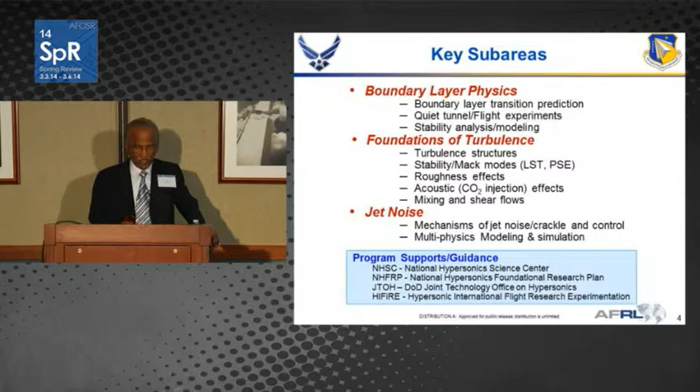And along with these sub-areas, I need to mention the other organizational tools we use to promote this research, particularly the National Hypersonic Science Center, and I will have a few slides as I go on, and the foundational research plan. This is another plan we use across the portfolios in the Air Force or program offices, and also supported by the Joint Technology Office run by the DoD and HIFiRE programs, which have a good connection with the TDs, particularly the RQ and other directorates.

Now, the scientific importance, as you see here, this chart illustrates everything of aerodynamics.

When you throw something in the air and want it to fly at Mach 6 or Mach 8, what are the forces and environment it will encounter? It's clearly illustrated there, starting from the stagnation point to the transitional boundary layers to the separation, the lift and the angle of attack, everything comes into play.

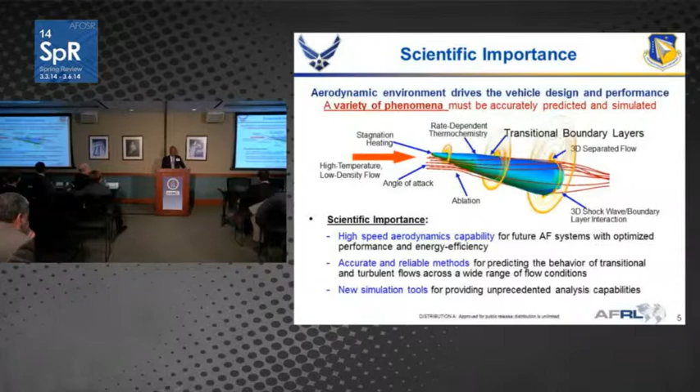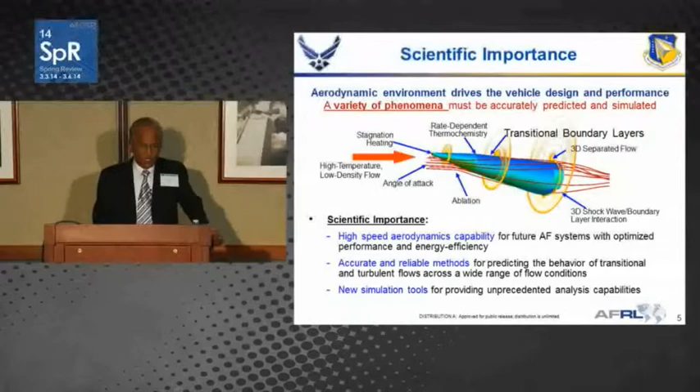And all these are important to study because we have to make the vehicle faster, lighter, efficient, and also controllable. And the importance, as I show below, high-speed aerodynamics capability is our Air Force main mission, and accurate and reliable methods. We have to create tools to analyze these aerodynamic bodies, and then simulation tools. I think we have to keep doing that until our beam energy folks can help us. Already it is coming into work, but still the conventional weapon system depends upon aerodynamic vehicles.

And when we talk about the potential revolutionized capabilities, we have to make this vehicle lighter and dynamically stable, and have increased range for reachability, particularly to deliver weapons. And the main problem with these fast-moving vehicles is the skin friction drag, which consumes a lot of fuel and becomes inefficient. And on top of that, the thermal protection system has to be lighter too. If you design it improperly, you will pay a penalty in that direction. So all these support facilities and numerical tools are very important.

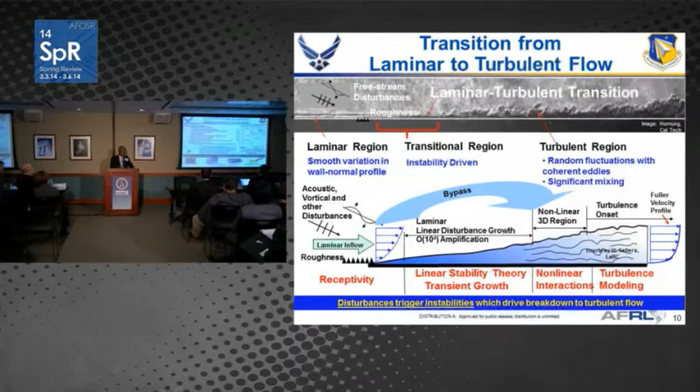Imagine the surface of the flying vehicle, and then the boundary layer builds over the surface like this. Initially it goes smooth, and then in a certain transition region, the disturbance develops into turbulence. Beyond this point it becomes completely turbulent. So the main disturbance factors are the key to understand the turbulence physics happening there. Sometimes the disturbances suddenly make the boundary layer transition into turbulence without even having a transition region. That's what is called the bypass region. So just to give you an understanding of how this transition flow is modeled and looked at.

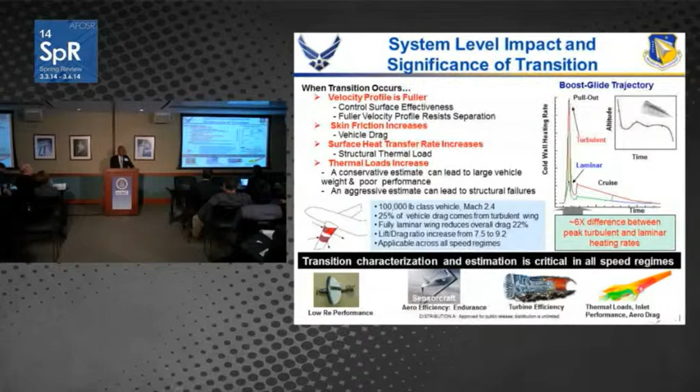Before we go into the various projects, I want to give the advantage of what all this is about. Particularly when flying aircraft, we want to have the maximum fuel efficiency, less drag, a smooth flow. As illustrated in this little airplane model here, there was a study conducted by Texas A&M University. They did the wing study and found out 22% of the overall wing drag can be reduced if it is fully laminar.

So that much potential is there, but we cannot have the whole wing laminar either, because that may be unstable. Certain times the turbulence can creep in suddenly, and then you may lose the controllability. That's why it's not wise to have it completely laminar. No matter how smooth you keep the wing surfaces, it will be turbulent. And the fear of separation is also there.

So to some extent we can reduce the drag by properly designing the wing, by balancing the lift and drag effects. So the main purpose is to reduce the skin friction and to reduce the thermal loads. That is the bottom line of the design goal here for any science to help in this direction. And as you see in the right side diagram, what is illustrated is a boost glide trajectory for a re-entry vehicle or a hypersonic vehicle.

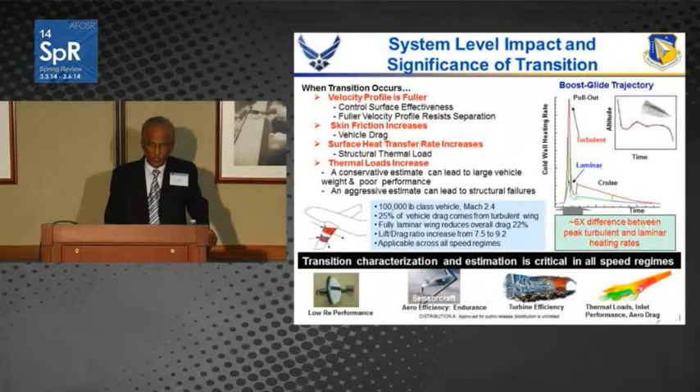As you see the pulse here, just the sharp rise and then fall, the estimated amount of heating is 6 times. Sometimes it can even be 1 order of magnitude higher heating rate compared to the normal level flow. So that is the impact we are against in designing hypersonic vehicles. In every regime and every type of aircraft we have advantages, but mainly when we go for hypersonics, high-speed vehicles, that is what we are up against.

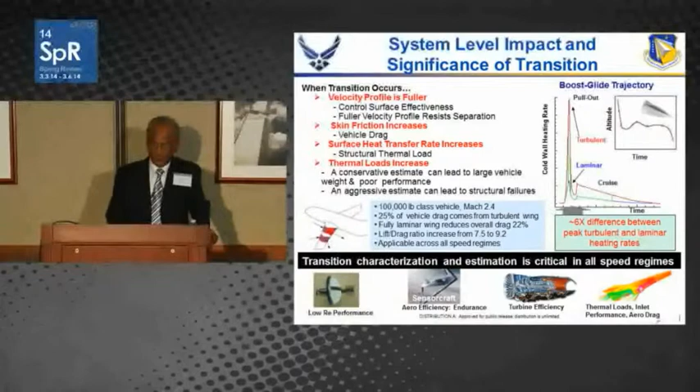But all we need for the AFOSR basic mission is some foundational research base, so that we are comfortable supporting a few PIs and carrying the science further without any interruption. So that's what we are looking for. With uncertain funding situations, that becomes very difficult. I should have growth for this portfolio. So that is the situation with respect to funding. Right now it's looking comfortable. The only thing is we are not able to make new starts. Probably down the road we should be able to gain that advantage also.

And the National Hypersonic Science Center, I will skip through fast because this past year NASA pulled out the $1 million support they gave. Luckily, for 4 years we successfully had that program, and last year the money was pulled out. So that program is closed now. The government, NASA and Air Force, evaluated that program after 4 years last summer and came up with some observations. The main observation was that increased emphasis on experimental work should be considered. The team, after studying these 4 years of progress, found that the experimental work should get more attention, which is a very valid recommendation and observation.

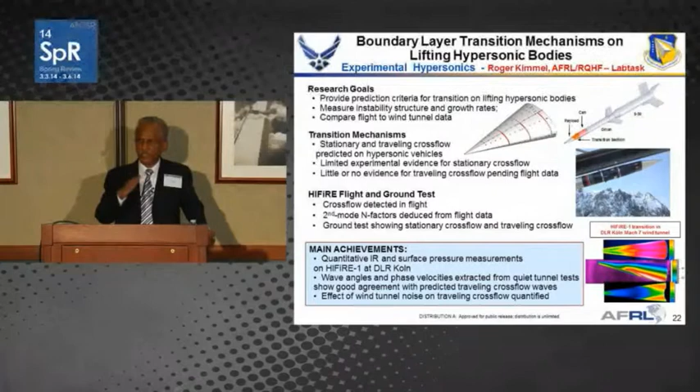For example, if you understand that somewhere along here from the nose tip the flow separates, then you can calculate aerodynamically what the drag will be and how you will stabilize the vehicle, etc. That's why it needs analysis, then wind tunnel test, and thirdly the flight test. If you can afford all those, that is the complete mission. You can fully understand a vehicle.

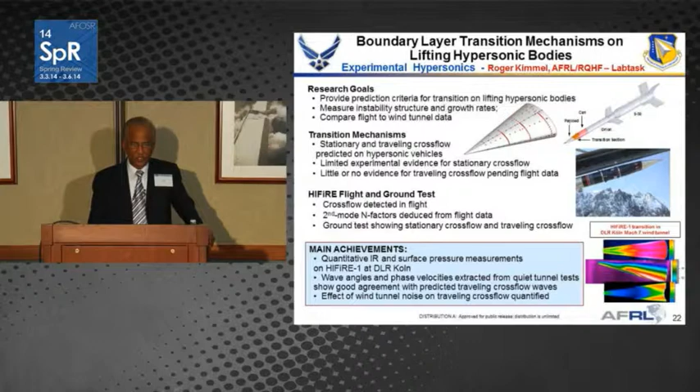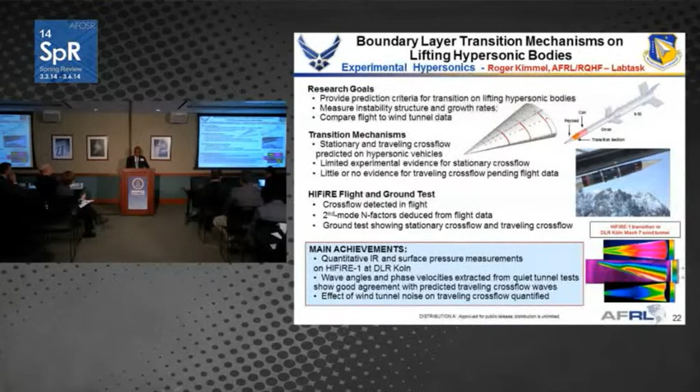For this particular experiment, Roger did wind tunnel tests at Purdue as well as Wright-Patt, and then he flew the HIFiRE version also. He has good results and is still studying further aspects. One of those study results is given here in two forms. On the left side, the blue colored picture is the temperature sensitive paint version done in a quiet tunnel as well as a noisy tunnel.

For those who are not familiar with quiet and noisy tunnels, the quiet tunnel means there is no wall-related boundary layer noise affecting your test object. That is what the quietness is. If you simply designed a tunnel, just a tube, put this object in and flowed Mach 6 flow, then all kinds of noises would disturb the boundary layer of the test object. They conducted tests to understand both aspects, quiet as well as noisy.

As you see, in the noisy tunnel the flow could not go beyond 4.9 million Reynolds number, whereas in the quiet version it went to a much higher Reynolds number. Similarly for this one, and these are the oil flow tests. They apply oil and it forms the picture of the streamlines. What you see there, like ribs, are all cross flow vortices, called stationary as well as moving cross flows. There's a lot of study involved, and Roger is making good progress.

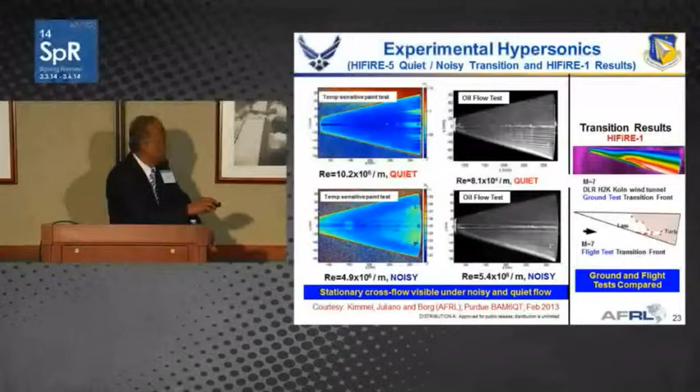It is still continuing. On the right, what you see is the HIFiRE 1 test results, where the wind tunnel test is compared with the flight test results. They're similar, but there is still a lot of difference due to some cooling effect of the actual flight compared to the wind tunnel test.

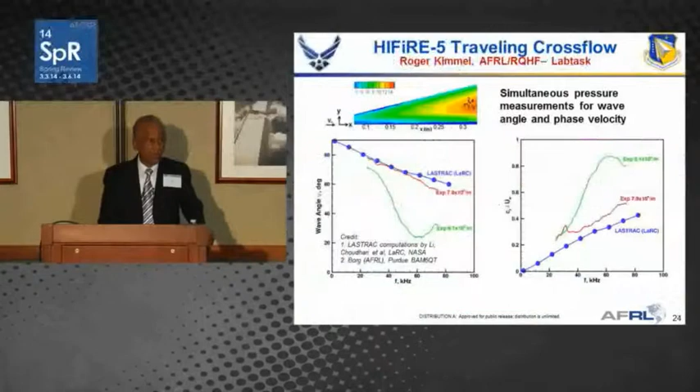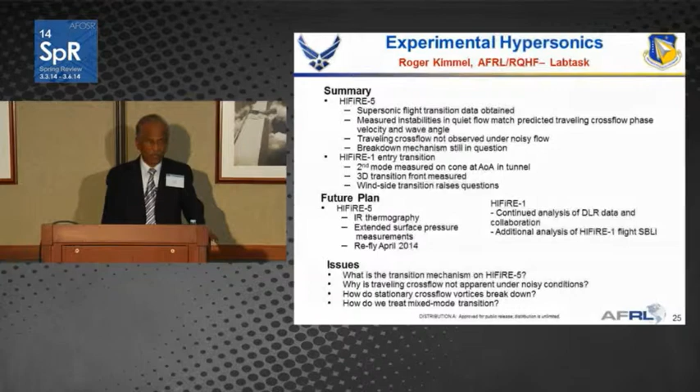This is another comparison of the simulation. The LASTRAC is Langley Research Center's numerical code, and the blue points represent that curve, whereas in the experiment, the linear theory applies only up to a certain Reynolds number. If the Reynolds number goes high, the linear theory fails. That's what is happening in both the wave angle and the velocity diagrams. There is still more to do; they are going to refly sometime this year. April is uncertain, he said, and in November he may have another test, so we will look for more results from that.

This experiment is by Professor Schneider at Purdue University. He owns and operates the Purdue tunnel. Air Force and Boeing paid to build those tunnels, he's doing tons of experiments, and many students are doing great work at Purdue. In this particular experiment, he studied roughness. The nose tip is missing, only this portion where they applied roughness elements by epoxy. They study the effect of that roughness on the flow and observe the transition. This is the picture of the transition, and thereby they are characterizing the particular cone and the flow models.

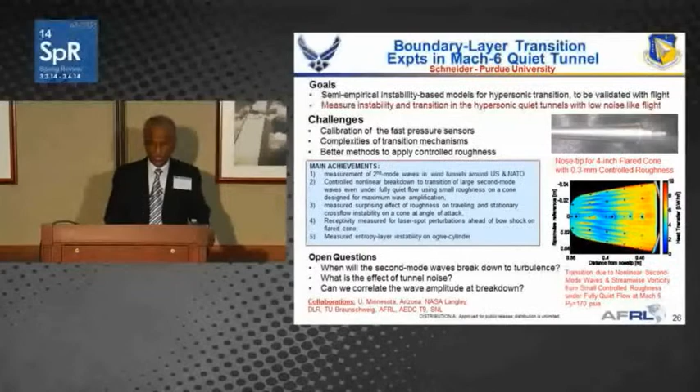And I have to move fast because my time is running out.

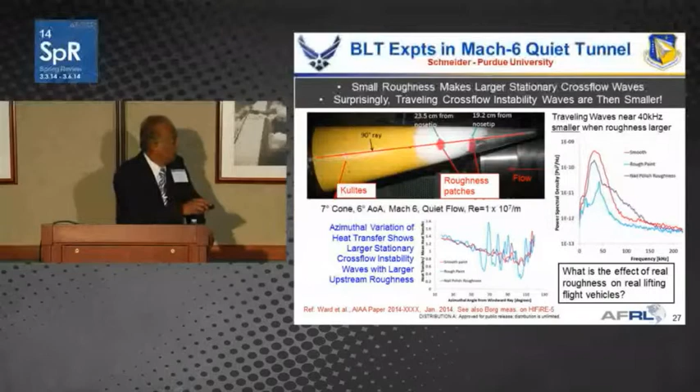This is again Professor Schneider's experiment, another straight cone with roughness. He tested three varieties: smooth paint, rough paint, and nail polish. I don't know how he picked nail polish to create roughness, but it worked for him anyway. The y-axis is the heat transfer, and the x-axis is the azimuthal angle. On the 360 cone, 120 degrees is where he is monitoring this ray, and he plots the graph for these three paint versions, showing different heat transfer characteristics.

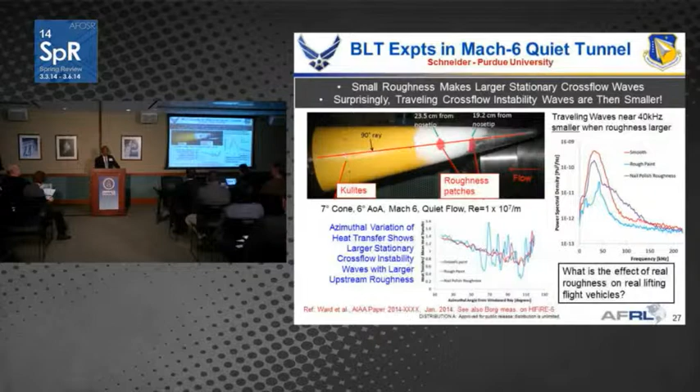Particularly the rough paint is oscillating too much, indicating instability in the flow. But he could not repeat the same observation on the other side, in the power spectral density, because of how the traveling wave is behaving. This again is cross flow, stationary versus traveling wave. There are two kinds: the waves appear stationary or moving. So he has inconsistent observations, and he's still looking into this.

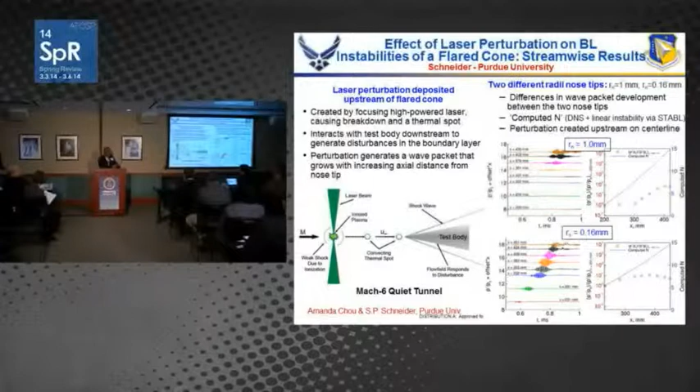And another interesting experiment Purdue does is depositing laser energy just as a pulse on the upstream of the flow, and then once it hits the cone, the flow behavior is mapped, and the wave packets are studied and plotted here. So one version is the pressure ratio with respect to time at various locations along the cone, and another one is the same plot for the nose tip radius.

Just the nose tip radius change affects the flow, and again that is compared with the computed N, that's called the amplification factor for the wave amplification, which is a scale of where the boundary layer transition happens. And there is some difficulty in matching these computed ones versus the experimental ones. They are analyzing those effects also.

And moving on, another experiment I wanted to illustrate here is how the boundary layer can be played with by various techniques. The researchers come up with endless ideas, and one of them is CO2 injection, the carbon dioxide injection, where the energy can be absorbed or desorbed depending upon the molecular characteristics of this gas. They found out CO2 has a very good effect in influencing the boundary layer transition. So this Caltech professor Shepherd has done this experiment. I think you might have seen this result before when John probably presented in the past reviews.

And the results are illustrated here for various gases, from air to fully 100% CO2, or a mixture, or nitrogen only. So the CO2 data points lie up here because that shows the delayed transition. This is the highest point. I mean, the boundary layer transition is way later. In other words, that's the best result with CO2.

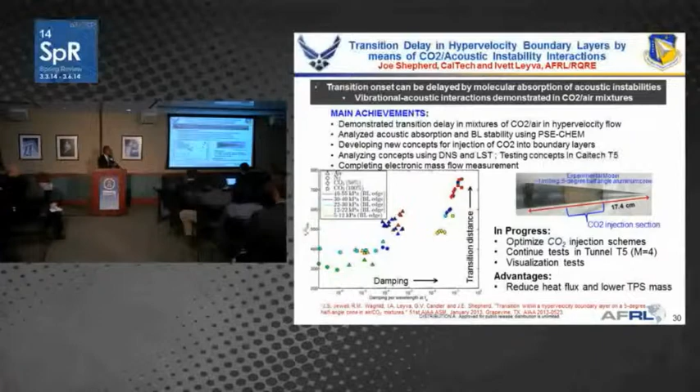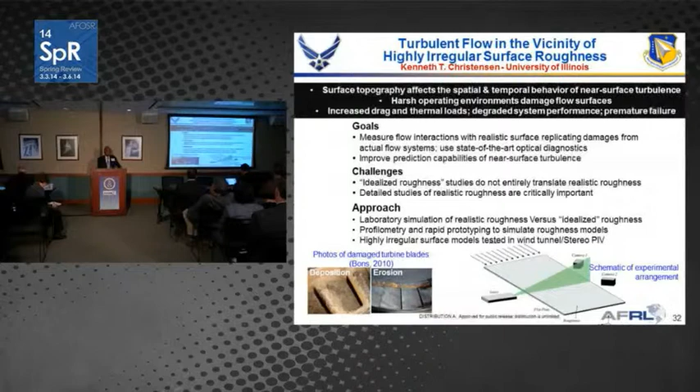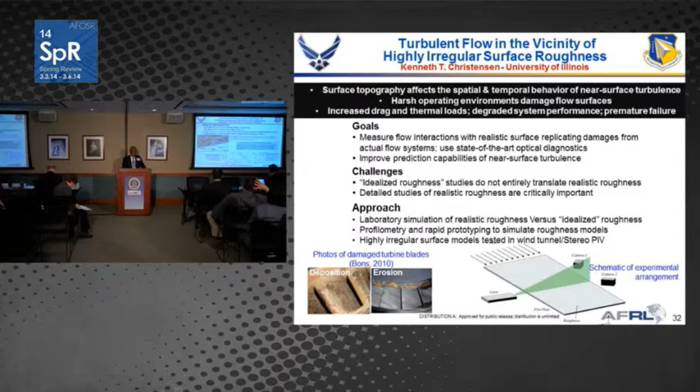And in foundations of turbulence, we have a couple of projects running. I mean, it's almost coming to an end. This PI is Christensen from University of Illinois, studying the roughness. For example, the actual roughness of turbine blades, as you see there, is really rough and rusted, and how will the aerodynamic flow happen there? That is his focus in this research.

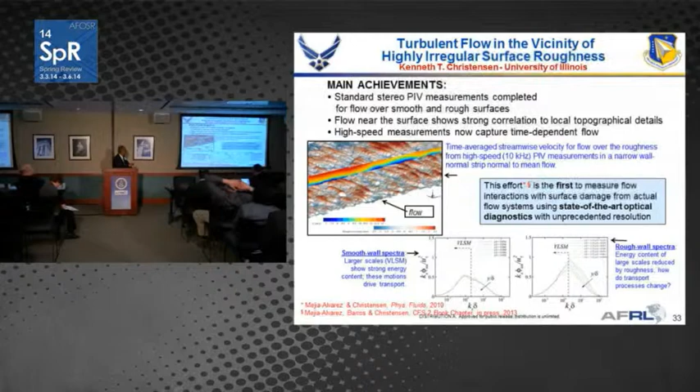And he mapped this roughness; the mountains and valleys are about plus minus 2.5 millimeters from the mean surface, and he is kind of mapping the flow velocity profile with that laser sheet. And he studied the smooth wall versus the rough wall, and he plotted the energy spectrum with respect to the wave number for the smooth as well as the rough.

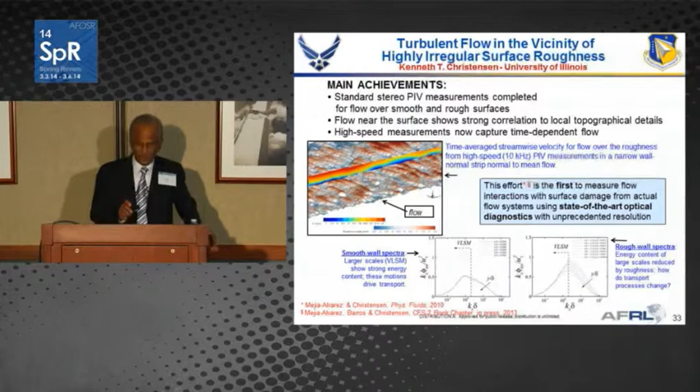So he found out the spectral energy density is different for both the cases, indicating that a rough surface should not be treated or modeled based on the smooth wall theory. There's a lot more involved in that, called very large scale motion versus the small scale motion. Depending upon the flow, it indicates that for rough surfaces, we should not be just using the smooth wall theories.

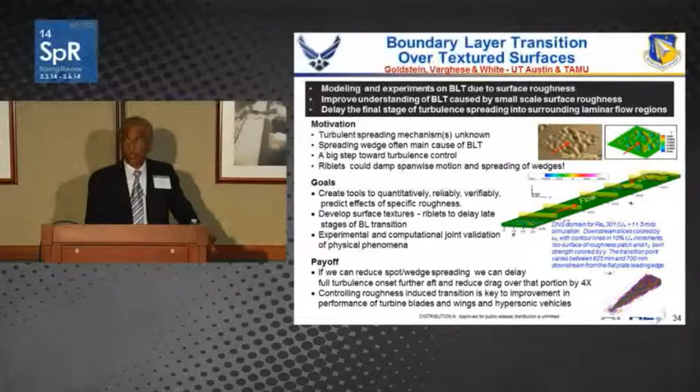And this is another one Professor Goldstein at UT Austin is doing. This is again related to a roughness textured surface. He thinks that by manipulating the roughness, he can play with the boundary layer transition better and have better control. What is shown here is the turbulence wedge. If you put a small pin or obstruction in the upstream flow, what happens downstream is what is illustrated here. This is called a turbulence wedge. Usually, the wedge spreads like a wedge, and all the streamlines and turbulence effects are illustrated in the numerical modeling. So this study studies that in depth.

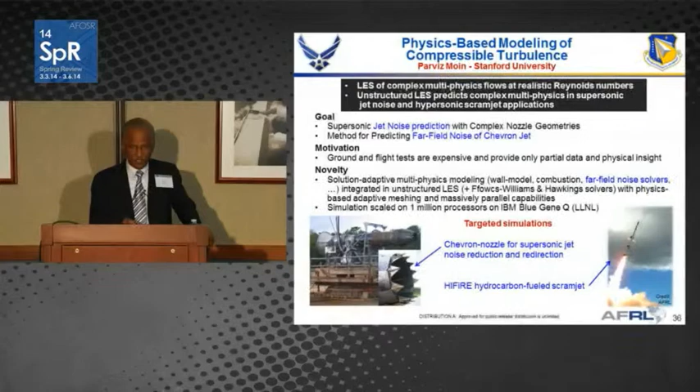And the jet noise project is again Stanford University. Professor Moin is studying this effect. You might have heard this also from John earlier in some other contexts, the million core computation this PI has done, and this is tremendous work mapping this jet noise. This is completely opposite of the other aerodynamic side of the transition and turbulence study, particularly with respect to noise. Here is the useful effect of the aerodynamics on the front end of the vehicle, whereas the noise is a waste, an unwanted outcome of our own creation. So that has to be studied and controlled as well.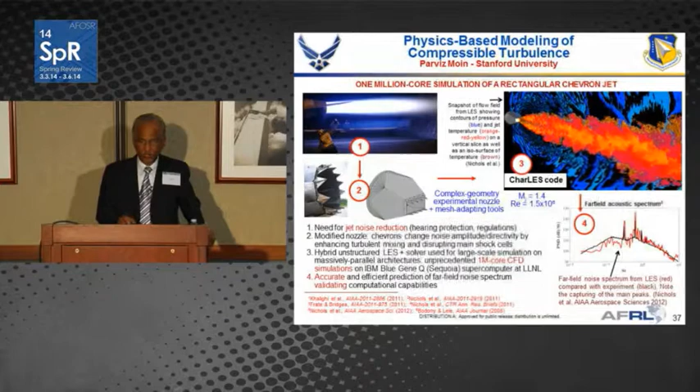And he also models the rectangular. This is an unusual type of nozzle. I think Air Force is coming up with a new design with the chevrons, and this is more commercial, and also the fighter jets, and these kind of multi-flow nozzles are also coming down the road. So we can model that using this program.

And the last project I want to show you is from OSU, Ohio State University, Professor Samimy and Professor Gaitonde. They are also working on the jet noise and control. Particularly here, they want to map and study this whole jet behavior with turbulence, and what they do is they put some actuators. Actuators in the sense, they put some plasma pulse, and that pulse disturbs the jet flow and then causes the turbulent structural motion like this, as simulated in this large eddy simulation.

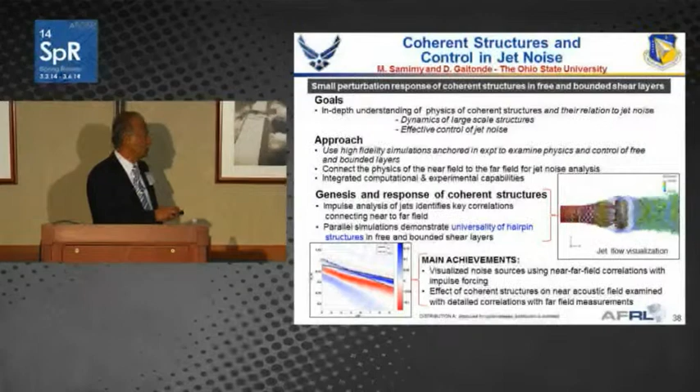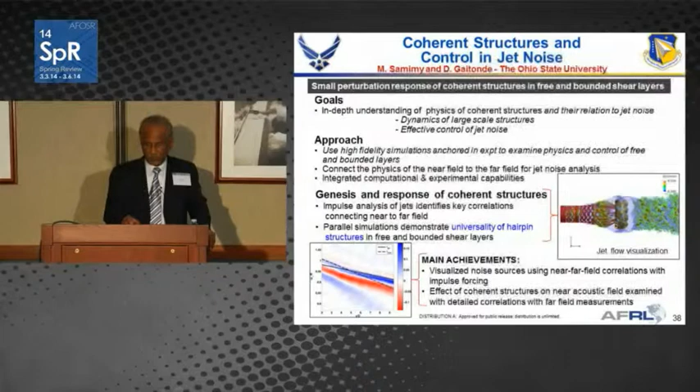And they also predict the time lag of the sound versus the fluid dynamic wave reaching the far field. So the lag time they calculate and then model this noise behavior. And there's some more charts on this. As you see here, a lot of computationally intense programs, and they map various controllability, and then how to reduce the noise. These are the main goals of these two researchers.

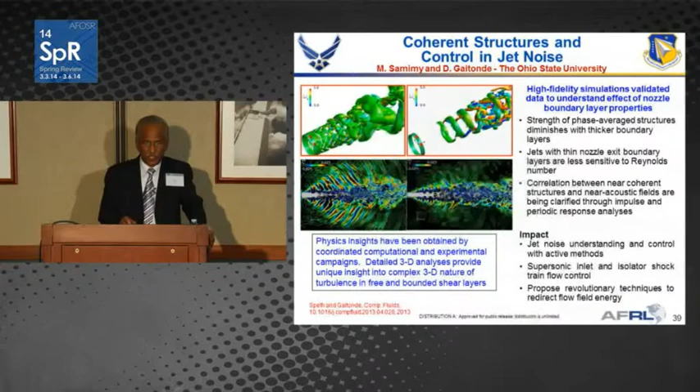And with that, I want to summarize: the state-of-the-art for boundary layer predictive models are maturing. In fact, the Hypersonic Science Center observation is the same also. Only thing is they have told was the eigenfunction method they used is not very helpful. They want us to go into initial value problem type solution. And then the quiet tunnel ground tests and flight tests are very essential too.

And then this portfolio, though it's new, it's just the first presentation I made here. I hope to grow this with the help of the AFOSR management. And I try to get other resources from YIP program, MURI, and other programs AFOSR has in their toolbox. So with that, I conclude. Thank you.